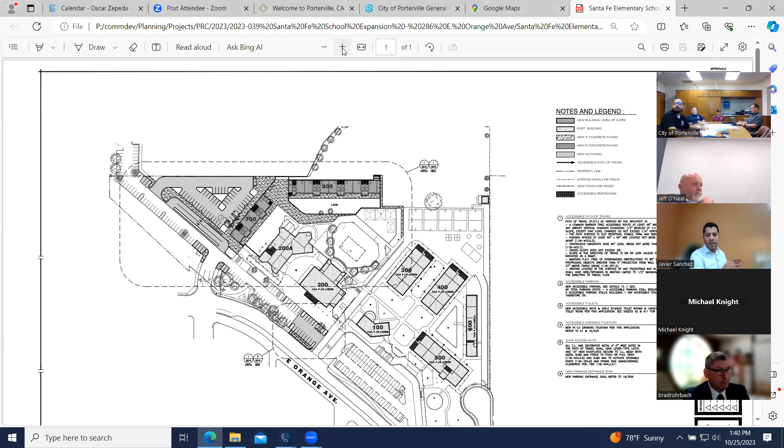So for this expansion, it's all on site, so there aren't really any comments from engineering since everything's on site. I imagine, let's see... I don't know if the buildings need any utilities, but I'd imagine they'd be extended from on site.

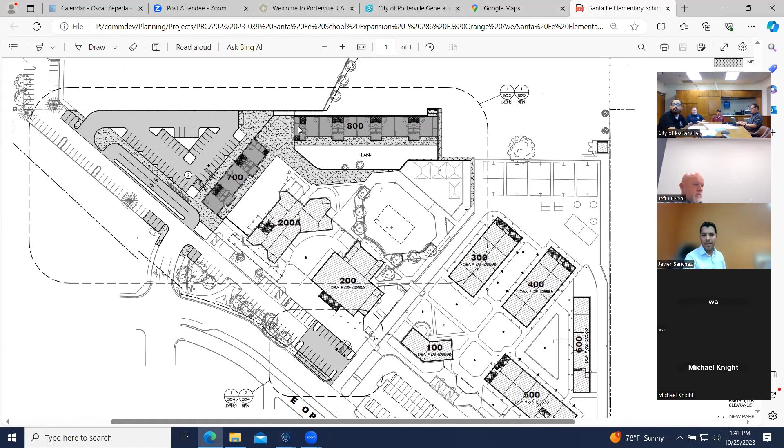Yeah, that's correct, Javier. This is Walvin with Engineers. One of the main purposes to get this through the city for review is that we want to make sure that the city's okay with us connecting to utilities, mainly water, sewer, and storm.

On the storm side, I was looking through some old drawings of this site, and it looked like the storm drain basin just to the north of this parking lot seemed like it was designed to take all the area already. So our question is, is the city okay with us connecting to the on-site storm drain system and just continuing the flow?

It is, yes. And then that leads me to my next question: with the new construction general permit, things are much more difficult now as far as trying to get projects terminated with the SWPPP. So does the city have any specific requirements on post-construction for us to be able to close out the SWPPP later?

We're trying to get our MS4 items into compliance, but what we've been doing for now is just stating in an email or letter that everything complied with our storm drain system or our storm drain master plan.

Yeah, and it kind of makes sense for this one because everything flows to the terminus basin there. It's not really going to a U.S. waterway, so I would feel like the city should be able to provide that, if that's something you see feasible. Yeah, we could continue to do that.

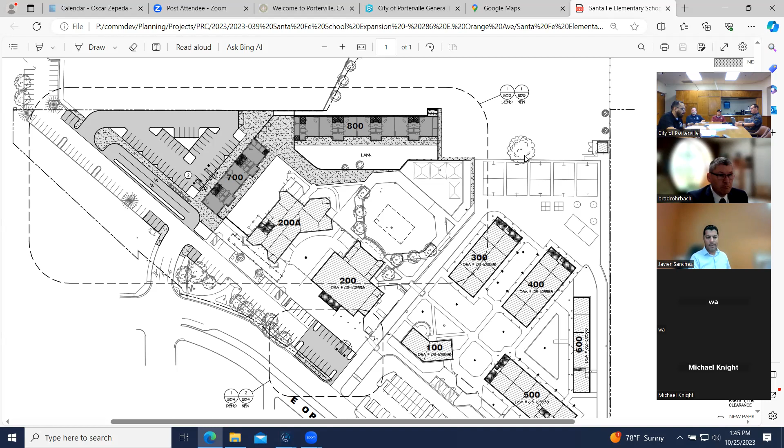As far as the planning division, we're not going to have comments on the project since it is a DSA project.

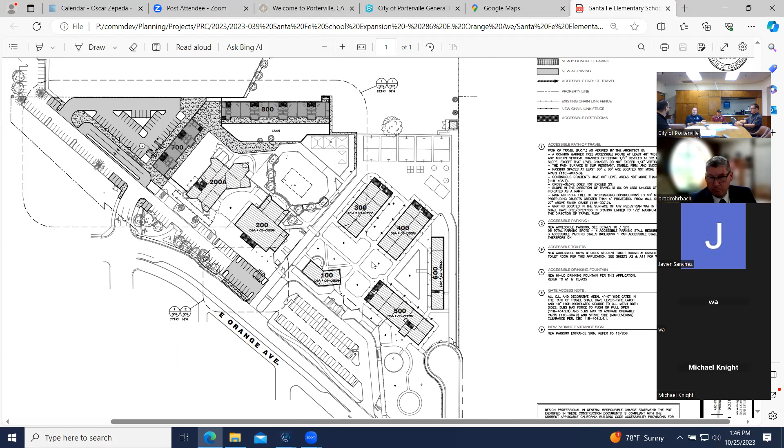With that, any comments from our fire department? The only comments that I have are under local AHJ, Authority for Water Supply and Access. The existing fire lane is going to need to be expanded so that we have a secondary access point, or actually a third access point, potentially between the 700 and 800 building, essentially tying into that center fire lane. You referred to it as an alley, but I believe that's the fire lane. That'll require knox access to the buildings. This project may also require the addition of fire hydrants, and we'll work with us on placement of the FDC fire department connections.

Thank you, Clayton. Next with our building division, with James. Yeah, with this being a DSA project, no comments. Thank you, James.

Next with our Public Works department, with Michael. Thank you. I don't think there's anything to address as it relates to refuse, I think everything is fine there. Just going back to talking about connecting to sewer and water—we need to make sure that this facility has the irrigation separated from the domestic use, so we'll probably be having that conversation. All irrigation consumption needs to continue to be separate from the domestic use, and all the necessary backflow prevention would need to be installed as well. The city standard meter would be applied if it's a new service being installed, or just confirming the source supply and the metered service for the connection or extension.

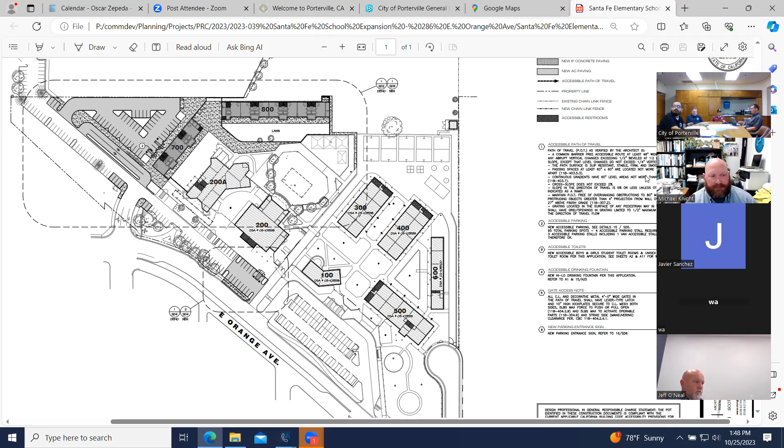So we can work through that once we have a little bit more detailed plans, or we can review that on site when the project starts to progress. But those would be the comments from Public Works. Thank you.

I believe that's all the comments from the city departments. Is there any other questions from the applicant? No, that's mainly our goal—try to get some feedback from the city and see if there are any obstacles that we need to address before we proceed with the application to DSA as well. But we'll be sure to submit plans to the city as well to make sure the utility connections and details meet city standards.

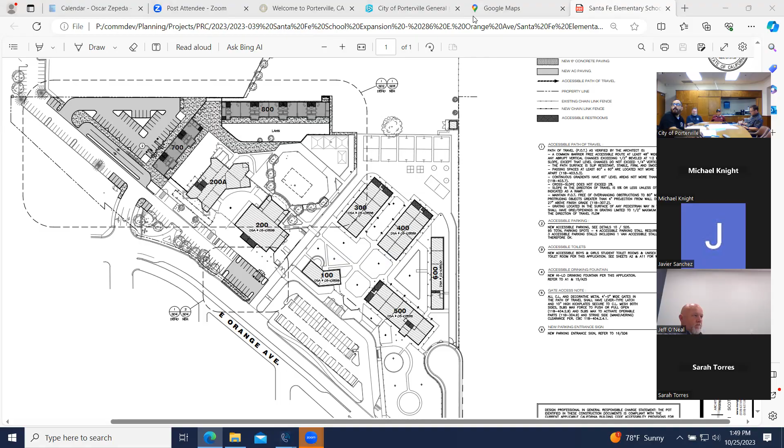All right, so we'll move along to the next item on the agenda, which is item number 2, a multifamily project located on Tomah Avenue. Let me share my screen here of the site plan.

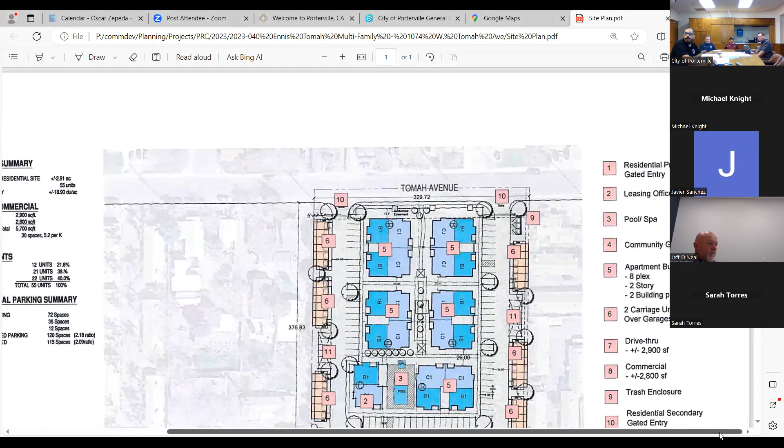All right, so for PRC number 2023-040, we have the applicant developer proposing a multifamily residential project consisting of 12 buildings with up to 55 units, that would include a leasing office and recreational facilities. The subject property is located on West Tomah Avenue, approximately 600 feet east of Prospect Street. The property is in the RM2 medium density residential zone district, and it also has a general plan land use of medium density residential.

So as far as planning department's comments, the use is a permitted use of multifamily residential. It does have a zone district of RM2, with a maximum density of 15 units per net acre. The property is about 2.91 acres. Depending on how much dedication may be required here on Tomah for the right-of-way, we were calculating about 42 units possibly, currently with the zone of RM2. It does not have a minimum unit requirement.

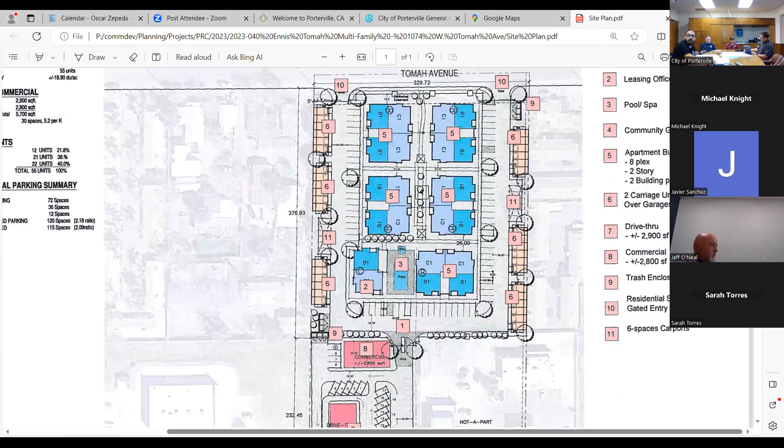Any proposed parking must comply with our chapter 304-10 parking area design and development standards. There is a bus stop here within half a mile of the project, so just keep that in mind for the parking requirements. Since it is a multifamily project within half a mile, you can have a reduction per state law.

Looks to me like all setbacks... I do see the garage covered parking on the east and west property lines. We want to make sure that they're outside of the setbacks, which is minimum 5 feet. Looks like they are, but I do see some of the coloring within that. Just want to make sure that you meet that minimum of 5 feet.

Also, in our code, section 20104B1 for parking and garage frontage, which would be this here, it exceeds our 30%. So we would have to possibly modify that to be under 30% of the total frontage. Our code under 20104, supplemental regulations, states that parking and garage frontage on the total frontage cannot exceed 30%. Currently, I calculated about close to 50%.

Of course, there could be ways to mitigate this, possibly by having a building here that would reduce that area. Again, it's under 20104, which says that the total frontage of parking areas visible from the street, including open parking, carports, and garages, but excluding underground parking and parking located behind buildings, shall not exceed 30% of that lot frontage.

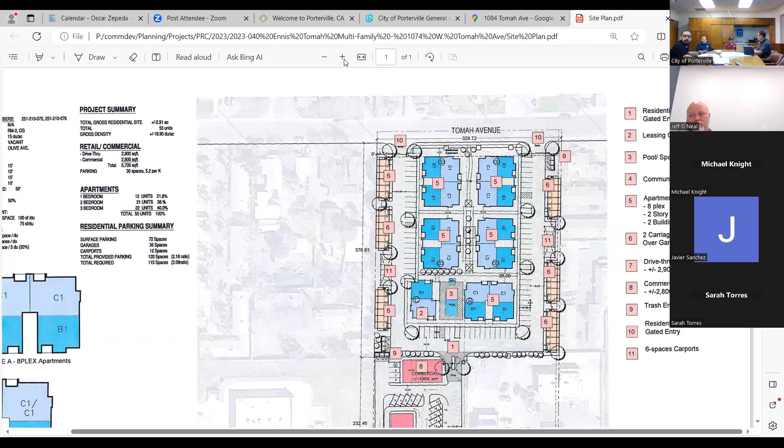So what we're trying to do is put the block wall on the property line, built out of non-flammable materials, and then take the actual studio apartments on top and slide those over 5 feet, running a steel beam or something across the top of the masonry to bear the weight, getting the actual living structure 5 feet away from the property line. That's how it's drawn now.

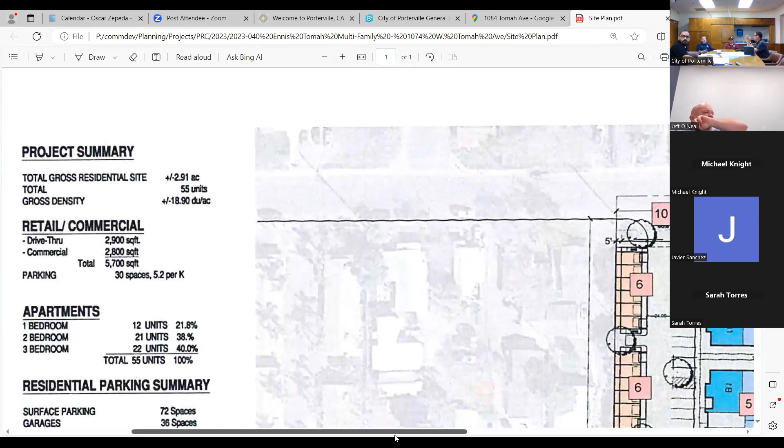And we could build the units out of steel—we could do whatever we need to—but we're trying to push the garage portion so the block wall serves as the back of the garages as well as the fence between the properties. So we're trying to do something a little creative to solve this.

How tall are you going to go with that block wall? My only concern is that with this flat 5-foot space across there, it's just a place to throw things, for stuff to stack, and for people to do dumb things. Maybe it's something that's angled and covered, maybe with a non-flammable metal roof or something. That does create a void space though. Well, you can't drain water onto your neighbors unless they agree to it.

We could put some type of system in to catch the water. On the planning side, we have that minimum 5-foot setback from the interior side for buildings. We do have a mechanism in our code to get relief from the zoning administrator to reduce the setback 2 feet, possibly having a structure at 3 feet from the property line. But it sounds like we're wanting to propose the structure at 0 feet setback.

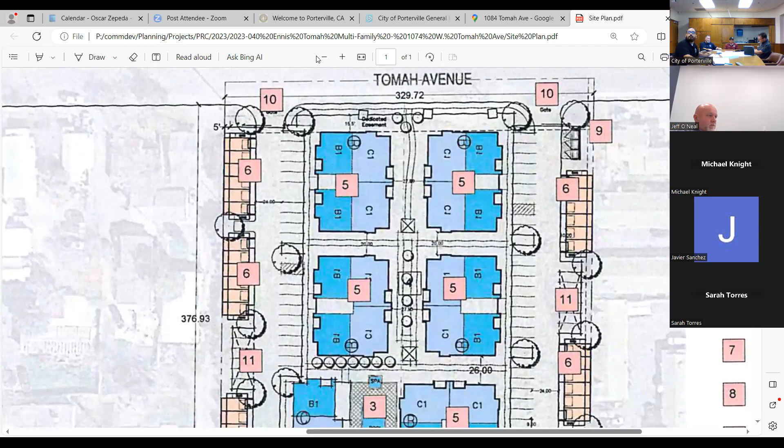For me, it's: project shall comply with the latest applicable codes, fire hydrants placed based on distance no greater than 300 feet. Where 2 or more hydrants are located, it has to be on a loop system. Depending on fire flow, additional hydrants may be required, standard comments. The hydrants must be in place and accepted by the fire department prior to any combustibles being brought on site.

Project to meet the minimum fire code fire flow requirements, fire sprinkler plans and calculations required, underground plans to be submitted with the above ground plans. Fire alarm monitoring plans, FDCs required to be within 50 feet of a fire hydrant in an approved location. Where conditions permit, the FDC should be no closer than 40 feet from the building.

This is where we kind of get into overlapping what they were talking about. You need to maintain 2 entry and exit points. I know you showed 3. However, because it wasn't scalable, I didn't really do the math, but essentially you have to take the diagonal distance of the lot, and the 2 accesses that count have to be at least half that diagonal distance apart. So even if you kept those 3 right now, you have 2, because you have 1 up at the top and 1 down on the south, right? But let's say we eliminate the one on the south - those 2 up there may not qualify you, depending on that measurement.

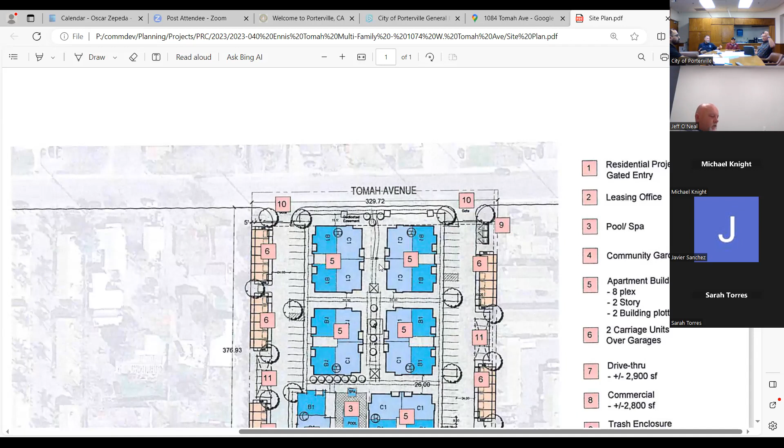So I really like the idea of having the access from the south, and that can be an exit only or a keyed entrance to the development for the tenants. We're showing 3 and all 3 would have gates with codes, and I like that. But as they talk about eliminating stuff like that, I'm gonna require at least 2 access points, so that'll need to be a consideration.

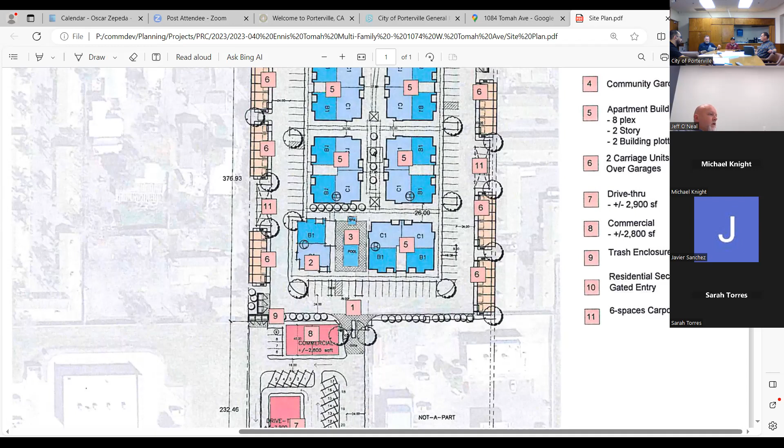And that's just how we calculate the distance based on the code. Any fire lanes in there have to be marked, obviously signage, that kind of stuff. There's no stopping, standing, or parking in the fire lanes.

Because of the way you have the circulation, there isn't gonna be a need for a turnaround. But for example, let's say you eliminated one of those up on Tomah, and we had that long stretch on, let's say, the east side. Because that extends more than 150 feet, there would need to be a turnaround down at the end, or at some point in that we would require a turnaround. So if you eliminate one of those and then have a drive path more than 150 feet in length, we have to have a turnaround at the end.

Address is posted on the building. Minimum of 20-foot roadways, unless there are plans for the eaves to be above 30 feet. If they are going to get above 30 feet, then the fire lane is 26 feet - it's for a ladder truck instead of just a standard fire lane.

So if the eave is more than 30 feet high, the fire code requires that the fire apparatus access roads be extended to 26 feet instead of 20. That's because we can put the outriggers and stuff out on a ladder truck - it just gives us more space. Typically on a 2-story, you don't get that.

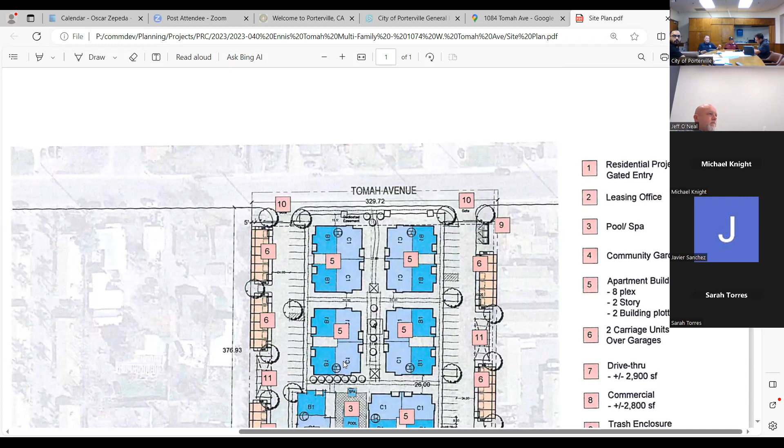And then Knox access is required, obviously, on the gates. If it's just gonna be a leasing office, not too concerned necessarily with that, but if it's gonna have any type of community center or gathering room, we'll want a Knox box on that place to be able to get in. In the event, for example, if they're having a party and somebody has a medical emergency but the door is locked, we need to be able to get in without kicking in the door - if you're gonna have a community room kind of thing. If it's just a sales or leasing office, I'm really not too concerned with that, but I'm more concerned if it's gonna be open to people to be inside.

And that's just the box that's mounted to the wall. Yeah, and as we proceed, we can go through and figure out what's best, depending on the gates, whether they're electronic or manual or whatever.

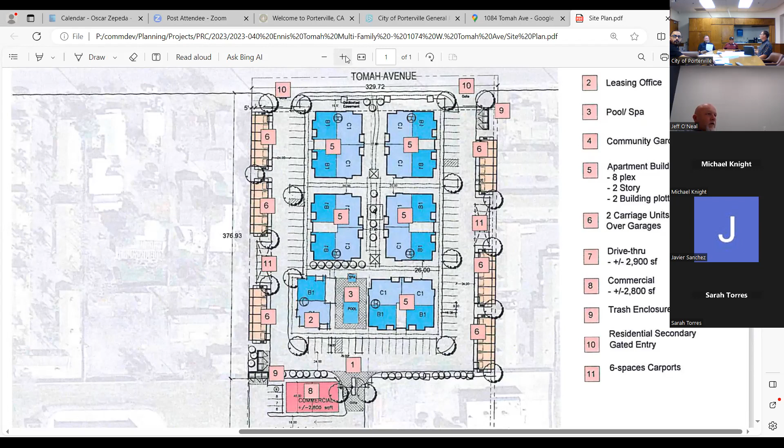What about a pool that has a gate with a coded entry? If there's gonna be a key to it, then I would prefer that we have a Knox box, whether it be on the building or on the gate, to be able to get in there. In the event that somebody calls, hey, there's somebody floating in the pool, can you get here and save them? We want to be able to get in.

I kind of envision going through a gate to get into the pool area, and then just beyond that's the community room, so it's all kind of together. So once we see the layout, we'll figure out the best location to put the Knox box. I also geolocate the box itself on a map for them, so at 2 o'clock in the morning, they can just pull it up and say, oh, it's right over here.

What's the fire code that this one would be under? 2022. It's got NFPA 13 in it or something. Oh, NFPA 13, yeah, so this will be the fire sprinkler system design, the NFPA 13, should be 13R.

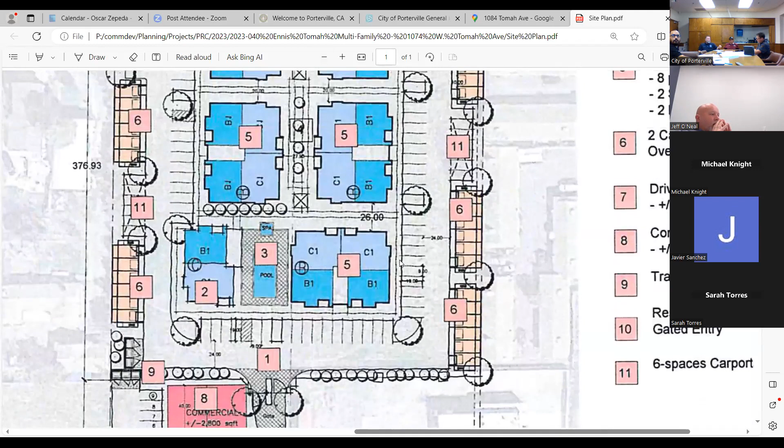And then the community center, just depending on the size of it, it depends, but that'll be a 13. So where you see that is if you go out on Pioneer, the new ones that were just built on Pioneer on the highway there - in their residential units, it's all NFPA 13R, but they sprinklered the community building as NFPA 13, and the difference is just the pipe. So it's the same design standard, but the piping is different. They've got steel pipe in the community center, but they allow CPVC in the other.

So R is more restrictive? No, 13 gives you more flexibility - the full 13 is the most restrictive, and then you have 13R, which is triplexes and above, and then you have 13D, which is single family duplexes.

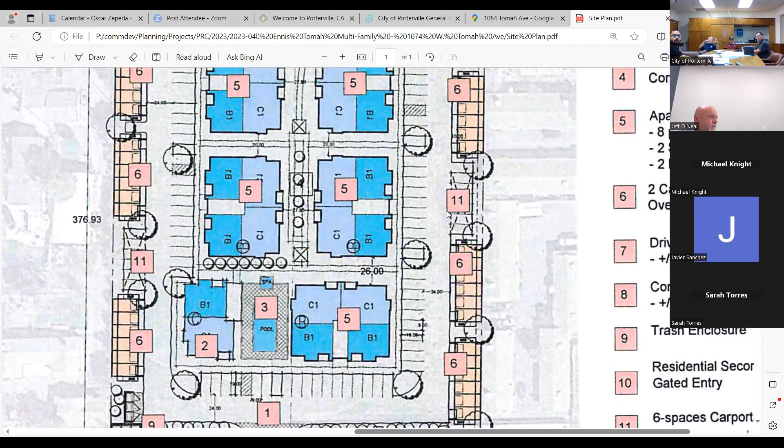And kind of like we did on that project out there, we grouped the majority of the FDCs in one location - just makes it easier at 2 o'clock in the morning to go to one location and know. So on this project, I'm just looking at it, we may end up with 2 locations. If we keep both of those entrances, we may put FDCs on one side on the west and FDCs on the east side, and then try to plumb them all to be close to each other and close to us in the hydrant.

But we'll look at that one. Okay.

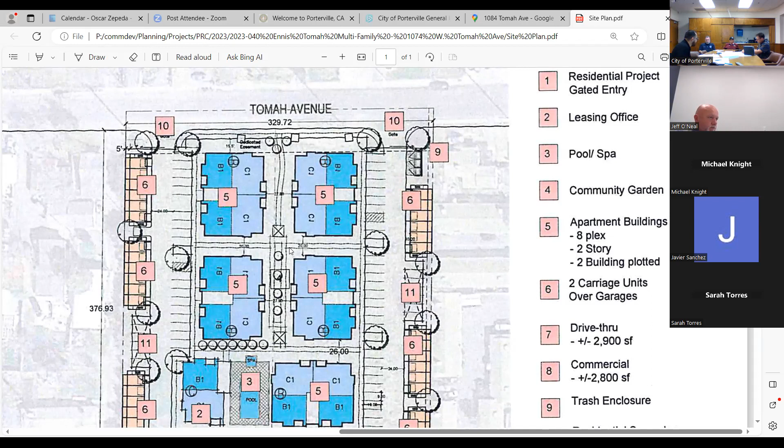Thank you, Jeff. Next with building, with James. Like Jeff said, we like the project, the design where you're talking about building off the wall.

If allowed, would definitely have to be an engineer design. Other than that, any other comments would be during plan review.

Thank you, James. You know, they will have to be adaptable, but that'll be during plan review.

Moving along with Robert Alvarez, our field service manager. We're gonna need some backflow devices on water service, fire suppression system, and separate the meter for landscaping.

Looks like you've got the bin enclosures. Depending on density, I don't know if that's gonna be sufficient. I think those are all the comments I have.

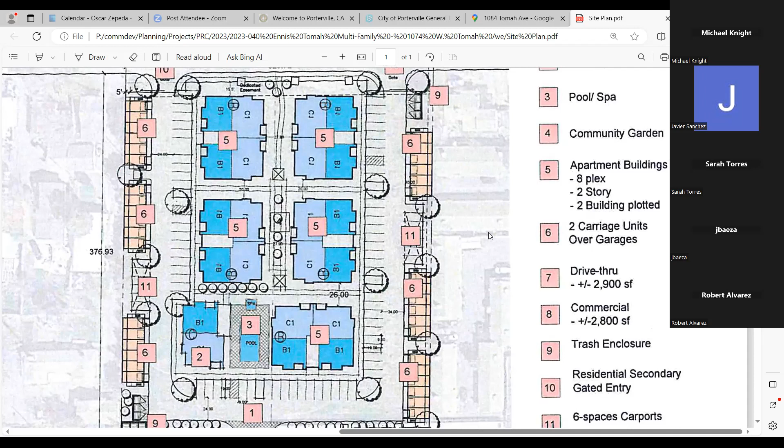Thank you, Joe. Next with Michael, our public works director. Sorry, technical issues, trying to get off mute. I would echo the same comments as Robert, just evaluating the density.

How many units for this development? As proposed at this time, 55. So that does increase it a little bit more. Usually the calculation on the bin enclosure is based off the density, so give me just a second here.

We're talking about the trash enclosures? Yes. Right now we're showing 2, trying to calculate if that would be sufficient for the proposal. So on 55 units, that would drive - 3 bin enclosures is actually pushing 6.8, so we would just need to look at that.

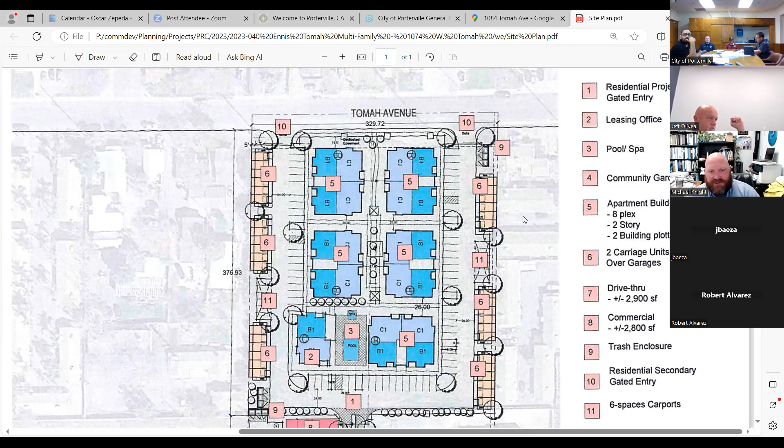I don't see any trash enclosures towards the olive portion of the project. There is one, just right there. Yeah, it backs up to the residential. Oh, okay, sorry about that, I didn't see that. So the driving number would look at 6 to accommodate the weekly service for the complex.

When you say 6, you're talking about the 6 3-bin trash enclosures. We can work on that number a little bit, there's some fluctuation in there. The problem is when we deviate to make accommodations for a denser service area, it increases the service, whether it's serviced once, twice, or 3 times a week. The goal is to minimize the amount of trips into the facility, so we try to design for the standard of 0.5 cubic yard of refuse per unit.

Has anybody done a design to double those enclosures up, like stack them from front to back? We've had them doubled up lengthwise, where they put 2 enclosures side by side, but I've not seen them back to back.

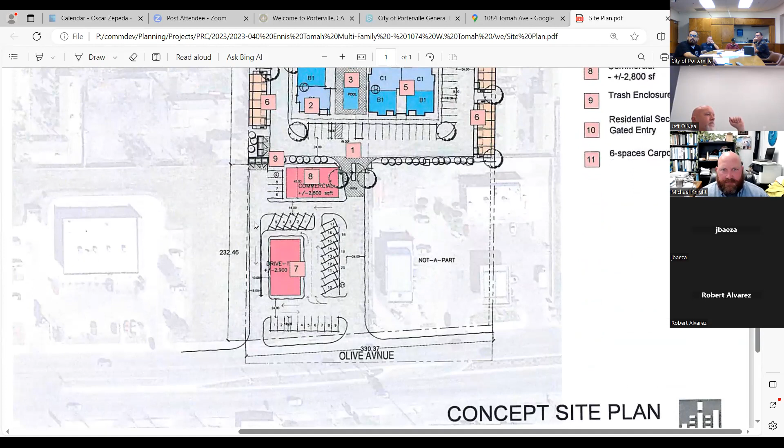Preferably a direct stab is better, like the one down by number 9 at the bottom. Those are both ideal locations. Anything you can put with a direct stab makes it easier for serviceability. Like the one at the front driveway, the driver is going to have to pull the bins out to the center aisle, service them, and then put them back. But it doesn't mean we won't, that's what we do. Ideally, if we have the ability to coordinate a direct stab, that's preferred, of course.

Yeah, I kind of anticipated that, thinking we could move it from the north end to the south end. I think the architect was just trying to make it convenient for residents so they didn't have to walk so far, those on the north end. Yeah, absolutely, but exercise is good, so I guess it wouldn't be the end of the world. Well, with the need to increase the amount of coverage, you may end up having to put one mid-block of the development anyway.

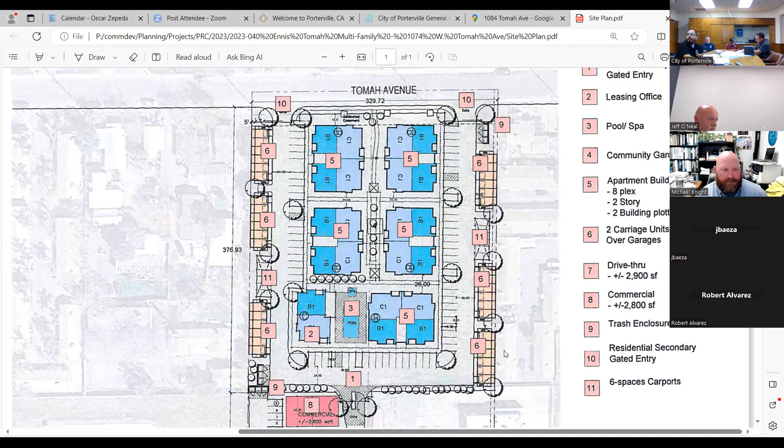And then Robert covered the importance of separating irrigation from domestic use and all the backflows. That should cover our comments. Thank you, Michael. Next, with our engineering division with Javier.

For engineering, we'd just be looking at the frontage improvements there. Hopefully that curb and gutter is in alignment to allow the poles to remain. We will be implementing the parkway standard, a landscape parkway with an offset sidewalk, street lights on the frontage, and then the pave out to tie all that in. Sewer and water are available. There'd be some areas on site that will need to retain drainage.

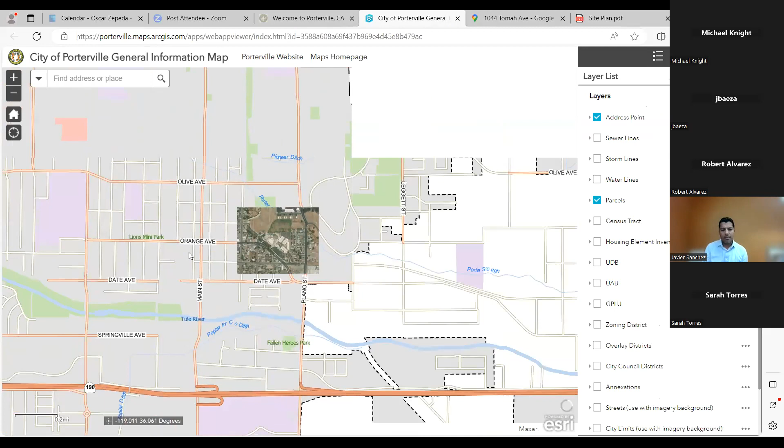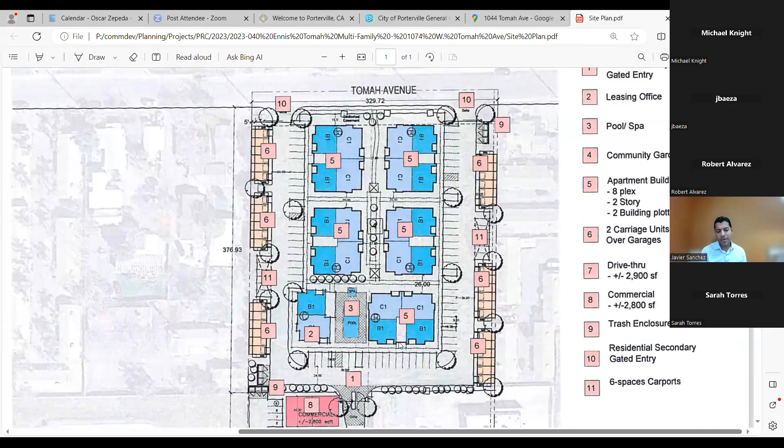Depending on what you can do with the design, there isn't a storm drain nearby on Tomah, you'd have to go out to Olive, and there's a DI down there. Would they be able to extend the line through the commercial development? Through here, Javier, possibly, if there's enough depth on that lateral, or else you'd cut a new lateral in off the main. But you'd be crossing the full width of Olive for that, or half of it.

So you said there's nothing on the Tomah side? No, it's an old county area, so the water would just kind of spread out everywhere. And that was for storm drain? Right.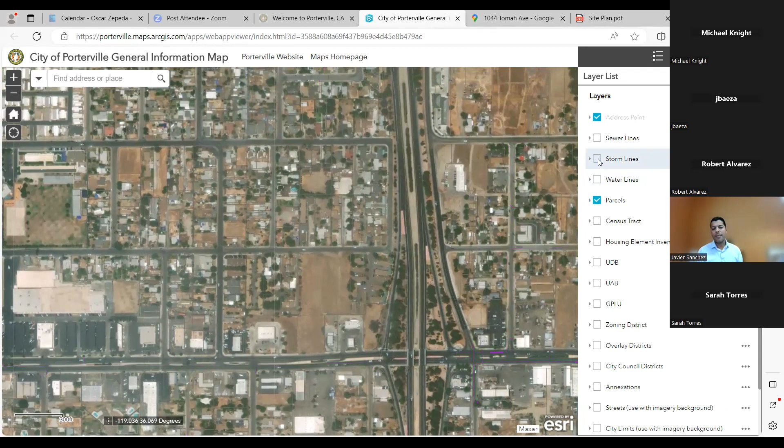Yeah, a certain amount will need to be on site, and you can achieve that through depressed landscape areas, pervious concrete, underground storage, those types of things. But that's all the comments engineering would have.

Thank you, Javier. I believe that is all from staff on this project. Are there any additional questions on this one from the applicant?

If not, we're always available to answer any additional questions you may have outside of this. Just for the record, this is just for the residential part. Right now, this is just for the residential, and the third item on today's agenda is the commercial. Oh, it is for sale.

Yeah, can you believe this, you paid attention, right? Made me pay another $500 for this next one. Always.

So with that, we'll go ahead and pull up the commercial project here. It's the same site plan, just south of the residential development.

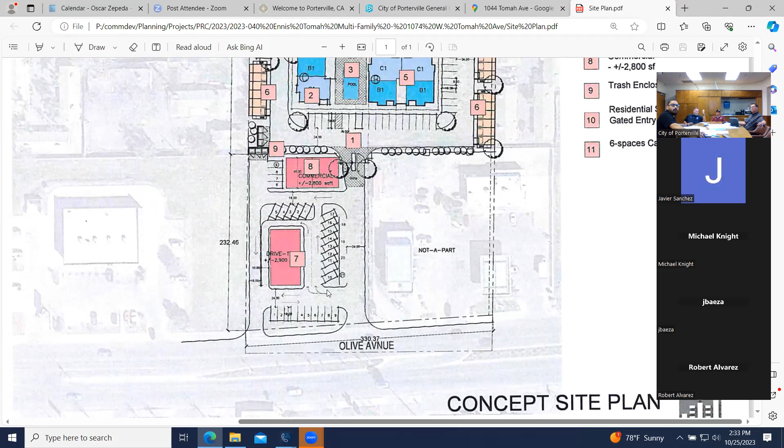And then Knox access, UL 300, if you're going to be doing grease laden vapors, obviously for the restaurant, that should be standard. Both of them, based on what they're proposing now, don't look like they're going to require sprinklers. So, as long as there's no crazy use in that small commercial space, it should be just fine.

What was it on the UL 300, the restaurant? The restaurant is a UL 300 compliant suppression system — basically it's the kitchen hood and a fire suppression system, whenever you're producing grease laden vapors. So, for example, Subway doesn't necessarily need one, but McDonald's does, because they're frying stuff.

And they've got deep fryers and everything, so then just meeting the minimum fire flow requirements and everything. Since they're not sprinklered, there wouldn't be a reduction in the fire flow requirements. So that may also drive an additional fire hydrant, depending on location and where the water lines, the water mains, and all that are. I can pull that up.

I think it's going to be an Olive and Tomah, so it may be good to go ahead and loop the system all the way through. The other thing is that gate you're proposing between the commercial and residential areas - there will need to be something recorded on the deed establishing it as a secondary fire access to protect it in the future. For example, if these properties separate later, another owner might decide they don't want people coming through and build a block wall, cutting off that access. So we'd need that recorded on the deeds as a fire department access to protect it going forward.

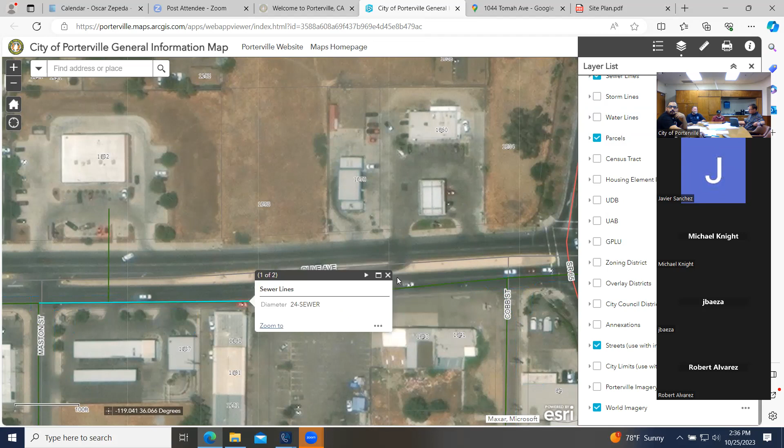Once we start seeing your final design and layout, and get a scalable set of plans, we can start looking at hydrant locations and things like that. Like the Chevron across the street - they ended up having to put in a second hydrant even though they had one on the Olive side, because of the distance of their frontage. Since they're on a corner, their frontage wraps around, and it ended up being more than 300 feet, so they had to put a secondary fire hydrant on the Cobb Street side.

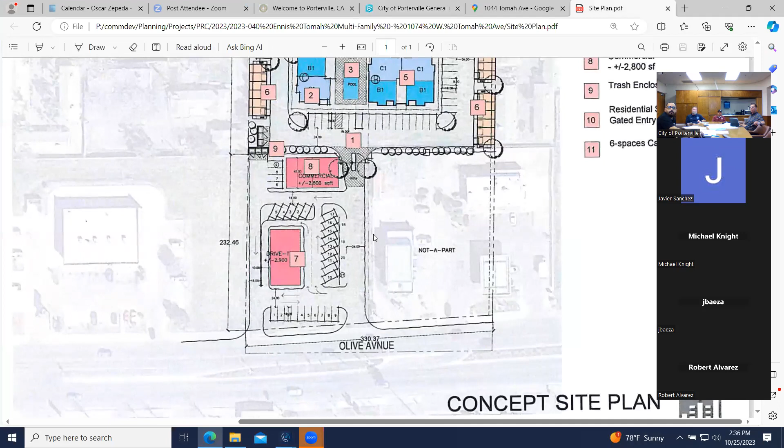Thank you, Clayton. With that, we'll pass it along to Javier in our engineering division.

All right, let me see. So here,

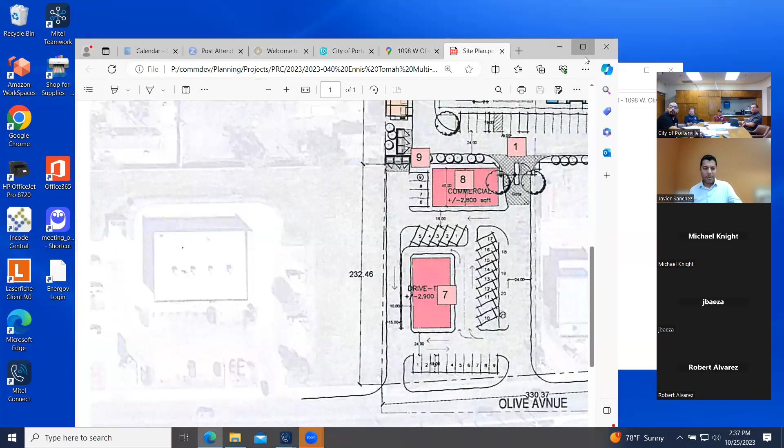The one main comment is that the site plan shows two access points, but with there being so many of them, we're going to have a comment to just limit it to one. Just to cut down on short circuiting trips, where somebody bounces out of one driveway into another, introducing more conflict points along Olive.

And frontage improvements-wise, curb and gutters there. Similar to the other side, it'll be the new standard, which is landscape parkway offset sidewalk.

On the two driveway approaches, are you saying take the one by the drive-through, and instead of going straight out, bring it back over to the entrance/exit where his cursor's at? Or if that drive approach shifts somewhere, whatever best serves the on-site circulation.

Yeah, we purposely played around with lots of different designs, but we purposely put the two-way in and out with a straight shot to the residential because of the traffic we anticipate coming in and out of the residential area. So it didn't affect the commercial - they're just passing through.

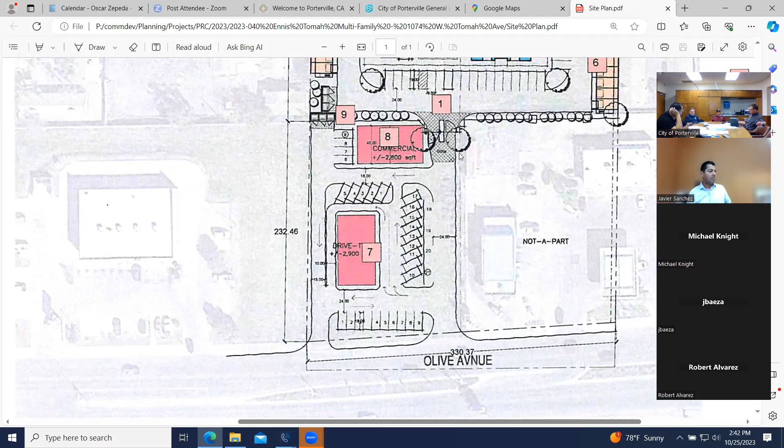Thank you, Javier. Moving along with our building department, with James. No, it looked pretty simple, no comment until planner review. Thank you, James. Next with Joe with our field services. I have no comments. Thank you, Joe. Next was Robert.

No, I got it. Backflow devices installed for water service, fire suppression system, separate meter for landscaping and domestic usage.

I believe you have the 3-bin enclosure, is that correct? Yeah, they have it up here. They're showing 1 3-bin enclosure for the commercial. Those are all the comments I have.

Well, they're gonna need to set it back a little bit for the landscaping perimeter. I'm sorry Oscar, what was that? No, James was asking a question about the enclosure, if it could be built at property line, or would it require a setback? Our code for planning requires the perimeter of that enclosure to be landscaped, with a minimum of 3-foot landscaping planter. So at least we would need that 3 feet for the planter to be at the perimeter. I'll go for the residential also. Right? Yeah, okay.

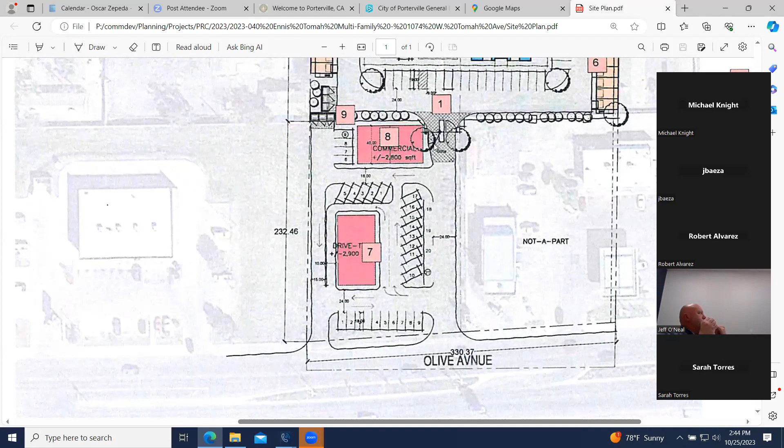I think we're good. Robert, next with Michael, if any comments? I think we covered everything.

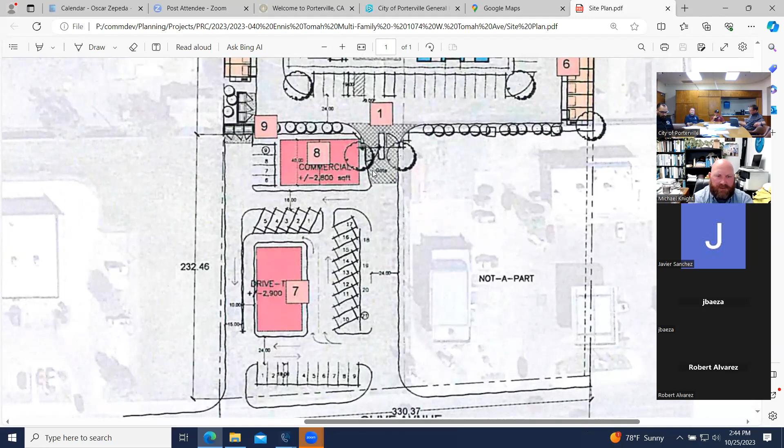Just a consideration on the commercial trash enclosure. I don't know that it warrants an additional 3-bin, but you may run into some issues with service depending on what's going on in the northern commercial building. You may look at adding an additional stall, either an extra recycle bin or an extra general waste bin, just depending on what your uses are. I know a drive-through restaurant or fast food generates a lot of cardboard. Although we're required to have the organics because of food generation, it tends to not generate a lot of waste out of the organics, but just a consideration.

I think we've accomplished the goal with having the 3-bin enclosure in there. However, depending on the uses of the commercial facilities, you could run into some loading issues on the separate bins. So something to think about as we move through the uses of those facilities.

Thank you, Michael. I did have a thought there, Oscar. On the trash enclosure, definitely for both projects, is the accessibility path to them from both the restaurant and the commercial. Just keep in mind, you can't walk behind any vehicles.

Go like this maybe. But to connect that drive-through, somehow you'd have to—like Wendy's has something similar, no? Well, but this has 2 buildings on 1 lot. It would be similar to what you have at McDonald's on Henderson. I think you hit it, Oscar, with Wendy's. The same thing with the apartments, you would still have to have accessibility to the trash enclosure.

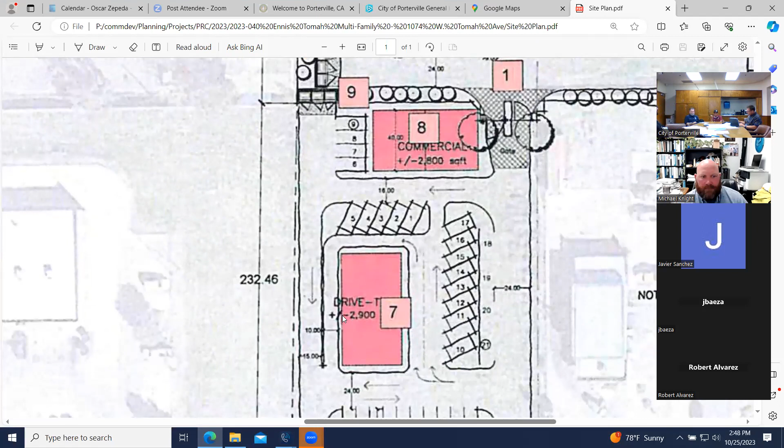But going back to Brian's site plan, like from the drive-through, say parking stalls 1 through 5, somehow you would need to go through there to get to that, to get to at least the commercial site, to get to that trash enclosure. Some this down, dotted over across here. Zigzag, as long as there's warning, detectable warnings, then it's not going behind parked vehicles.

Also, as you design those enclosures, make sure you maintain the separation between the sprinkler buildings, so you don't have the sprinkler and trash enclosures close together. Right. The sprinkler and the trash enclosure—if you're close to the sprinkler building, yes.

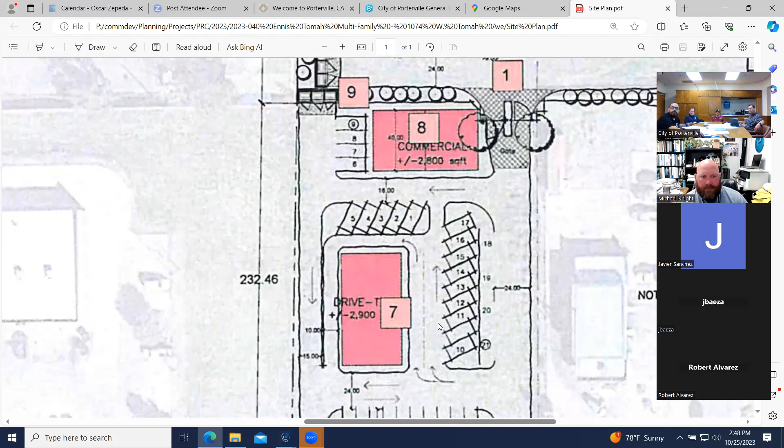If a second enclosure may be required, you can always try to fit it in this area, down here, make it easier. Again, you may be able to reduce some parking stalls depending on your floor area of your restaurant, your customer seating area. You could maybe get flexible there.

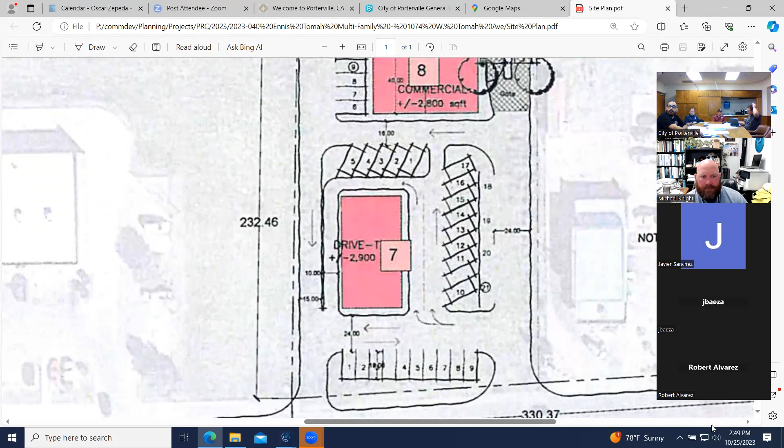All right, I think that's all from staff. Are there any additional questions from the applicant on this project here in the commercial side?

You said the parking would vary based on the usage.

Yes, on the usage. On the commercial building up top, I just provided retail parking standards, 'cause I think that's what the application stated, which is one parking stall for 250 square feet of floor area. But on the restaurant side, it requires at least 2 minimum parking stalls, in addition, depending on how much customer seating area you have. So it's 1 parking stall per 75 square feet of customer seating area. So the building might be 2,900 square feet, but how much of that is seating area? And again, that could give you some flexibility there on maybe reducing the number of stalls to probably make it work better. Start with the math on the seating area and then add 2.

We'll require a minimum of 2. Let's say you have zero seating area, you at least have to provide 2. But it wouldn't be 2 plus the 75 square feet. No, it'd just be 1 per 75 square feet of seating area of the restaurant, of the total building. Because it's 2,900 square feet and let's say 1,000 square feet of that is seating area, so we'll calculate the 1 per 75 on that 1,000 square feet of seating area. Oh, it's based on the seating area for restaurants. Yeah, okay.

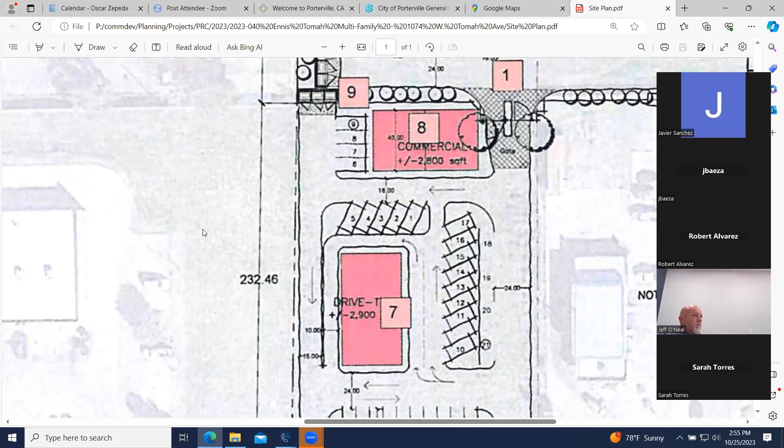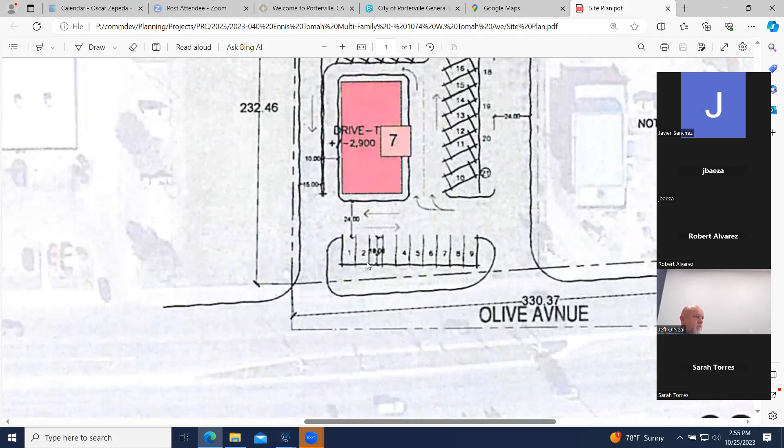And then now I'm thinking about, now you need path of travel from the street, so you need an access point to the front door from the street, from the public way, to the back public way businesses. Would it be better placing the building down here maybe? I mean, if you run a straight shot from the sidewalk just to get like this, to the sidewalk. What about the back businesses?

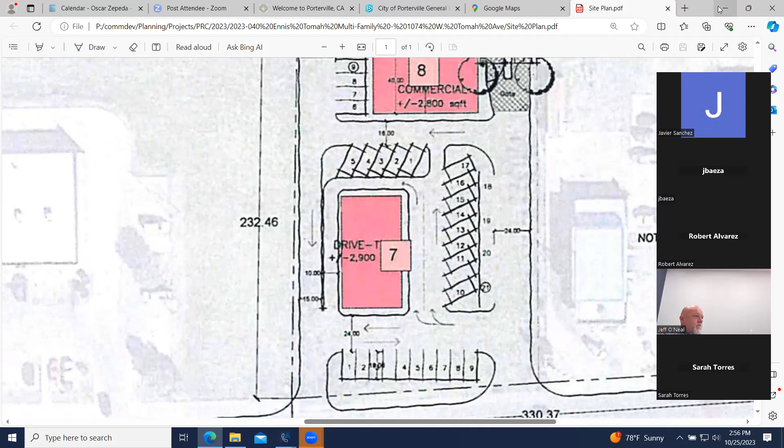Oh, 4 feet, so if we needed to, we could take 2 parking spaces. I'm just thinking, are you gonna have that accessible path to travel across that drive-through entrance? You would have to, yeah, kind of like how Wendy's is. But there's a path of travel from the Olive sidewalk, it starts from the Olive side, like this one here, James, here? Yeah, right, good, yeah, somebody walking.